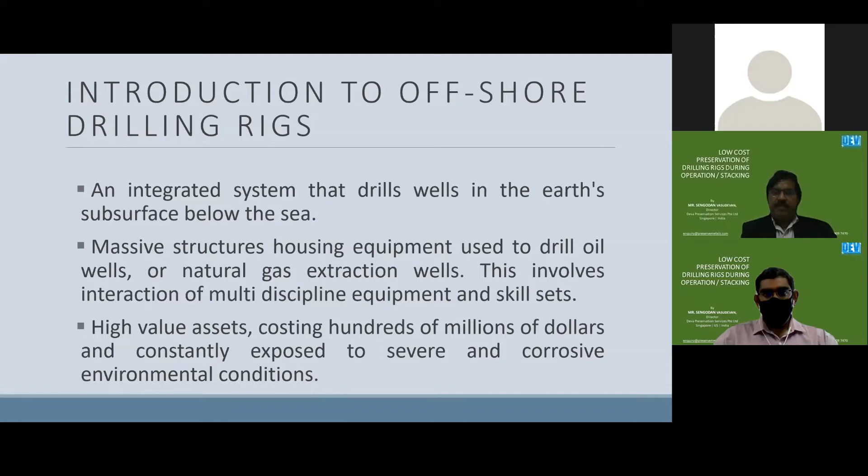And because it is such a high value asset, it becomes a necessity for us to keep it in good condition so that during its entire service life, we are able to spend minimum on repair and rectification cost. And as we all know, in the equipment or structures, wear and tear is a well-known, well-researched and documented phenomenon, wherein we know what to replace when.

After so many years of operating hours, bearings are to be replaced. After so much time, which parts are to be replaced for wear and tear is well documented and recommended by the manufacturers. The area wherein we normally have surprises and shocks which can lead to sudden non-availability of either equipment or a system is corrosion. As we know, corrosion doesn't add value to the process, unlike wear and tear, wherein the asset was under productive use. Corrosion is an unproductive loss of the life of the asset, and as a result, this is to be addressed and eliminated completely if possible. If not, it should be managed so that during the entire service life of the rigs, there will not be any necessity to repair or rework any part of the equipment or systems.

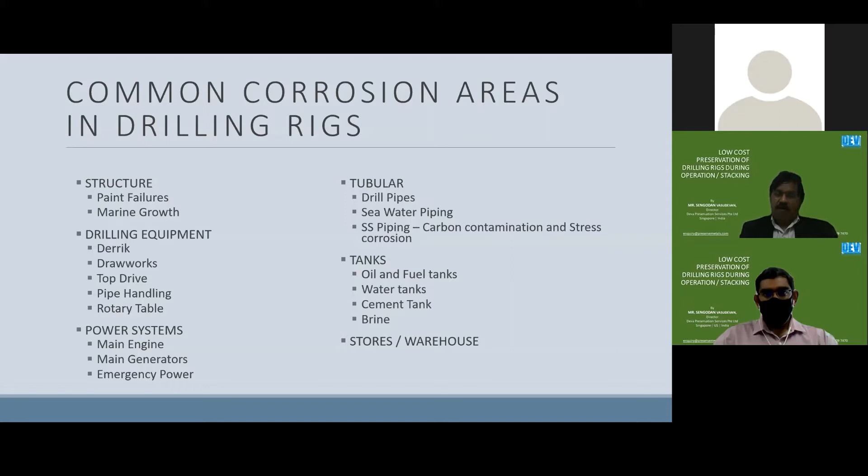One other area of keen interest is the warehouse or the stores, wherein high value spares are stored on board the rig, and in many cases you don't know when there will be a breakdown requiring replacement, and these spares could be stored for a number of years. This is one area where we have significant corrosion issues, and as a result, when the part is needed for use, in some cases the part is not usable, and we have to rush for spot spares urgently.

Similarly, there are other areas like well control, mud systems, lifting equipment, lifeboats and the accommodation, wherein these are various locations where we have either a corrosion related issue or an asset deterioration issue, like the development of mold and mildew.

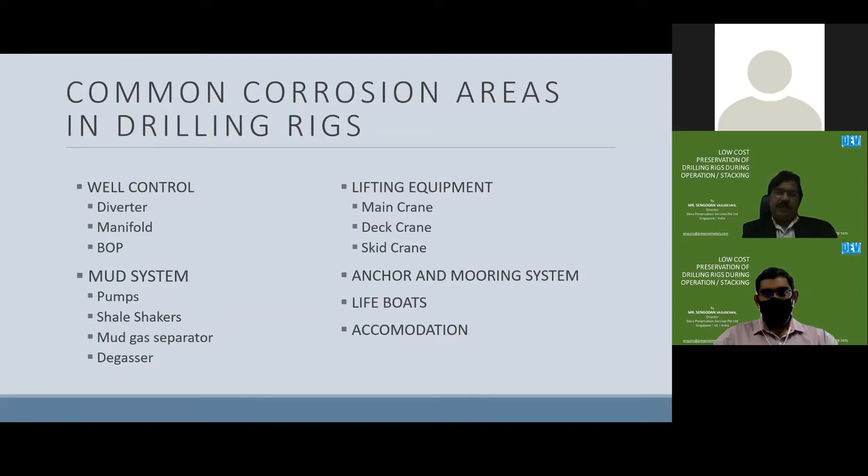Some pictures of the problem scenes have been shared with the team, to have an idea of where such kinds of problems are seen on a drilling rig.

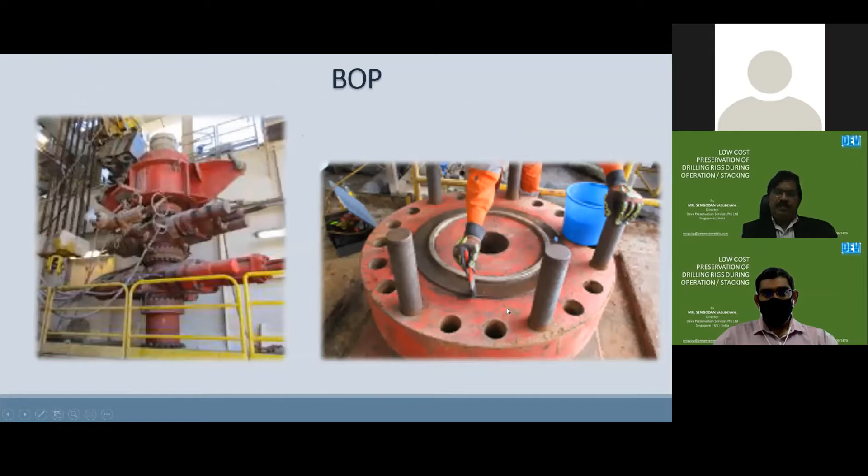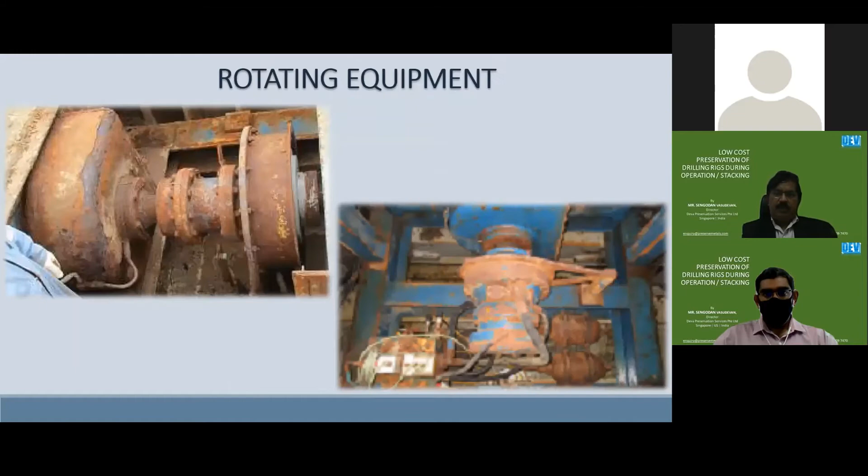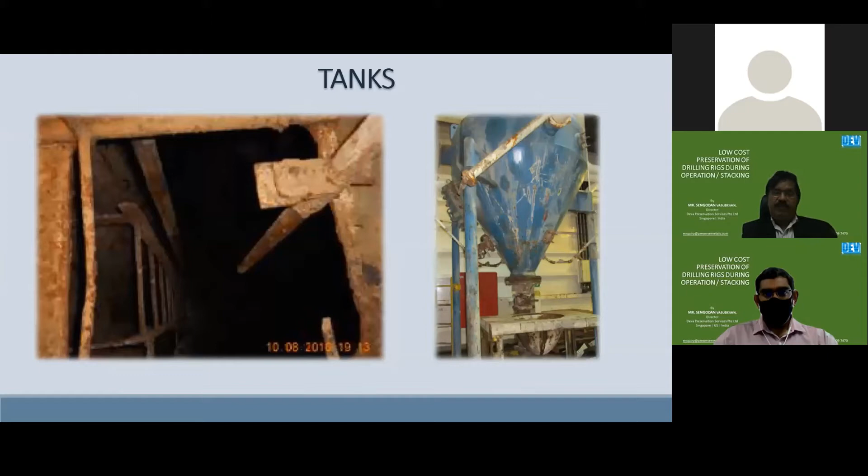Naturally, the tubulars, especially the ones made of carbon or alloy steel, have significant corrosion issues. Also, some of the rotating equipment exposed to the weather elements, the traveling blocks, the tanks, are some of the areas where we have observed quite significant corrosion problems onboard.

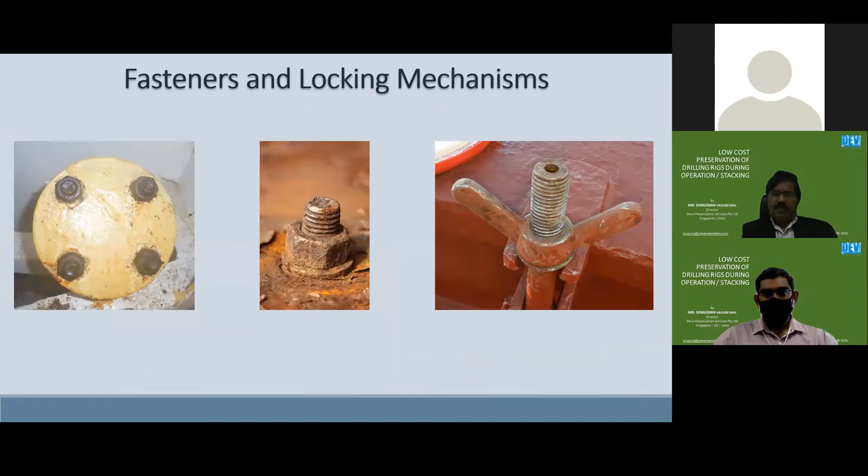And similarly, the various fasteners and locking mechanisms on the deck and outdoor areas. Then, as we indicated, some of the spare storage areas and also the panels. Relatively, in an operating rig, corrosion inside the instrumentation area or the panels is very limited because they are operating powered up and also air conditioned.

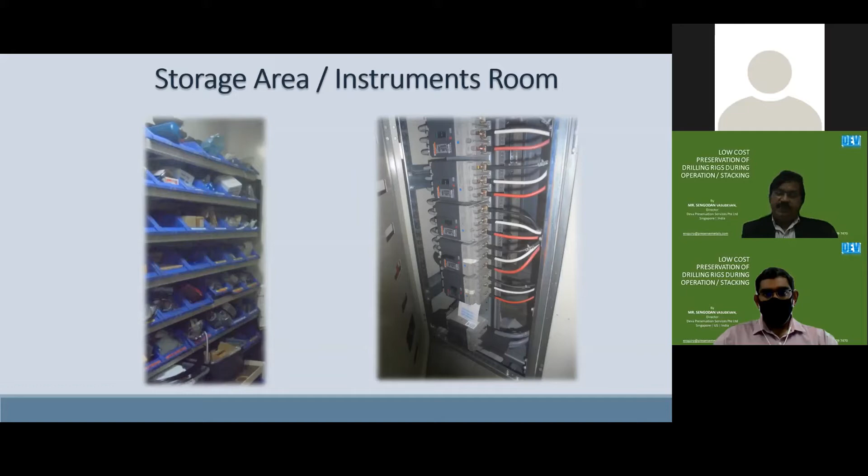However, during layup conditions, these are some of the items which suffer corrosion related failures and cost quite significantly at the time of reactivation.

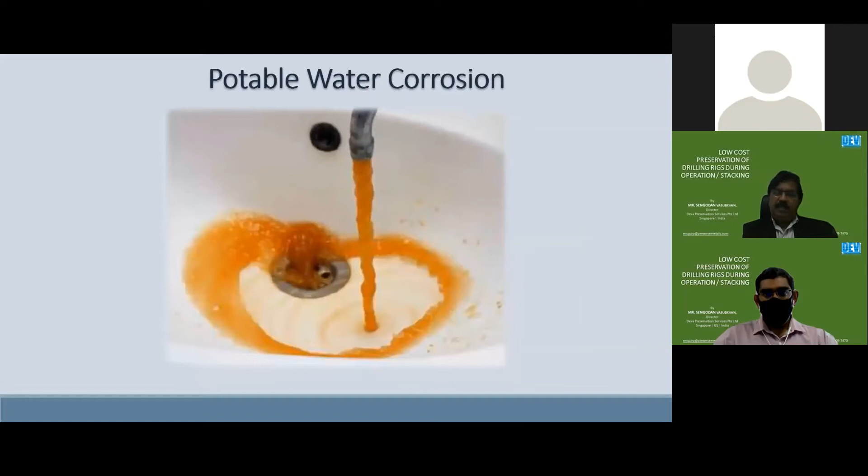In addition to the corrosion related to carbon steel or stainless steel contamination and associated corrosion, we also currently have other problems which are impacting, one being the infected surface. This currently requires disinfection, especially due to COVID and its consequences, the necessity to protect our crew from the infected surface becomes a very important requirement.

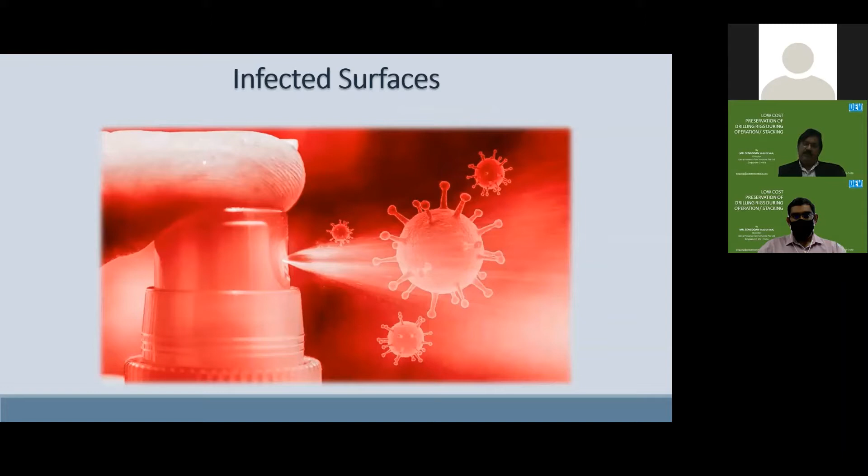Moving to this, the mold and the fungus. These are basically the problems we see significantly in the stacked vessels which are not air conditioned or using dehumidifiers. In such conditions, we find the mold and fungus formation, and also in other areas wherein because of the high humidity, this problem is seen.

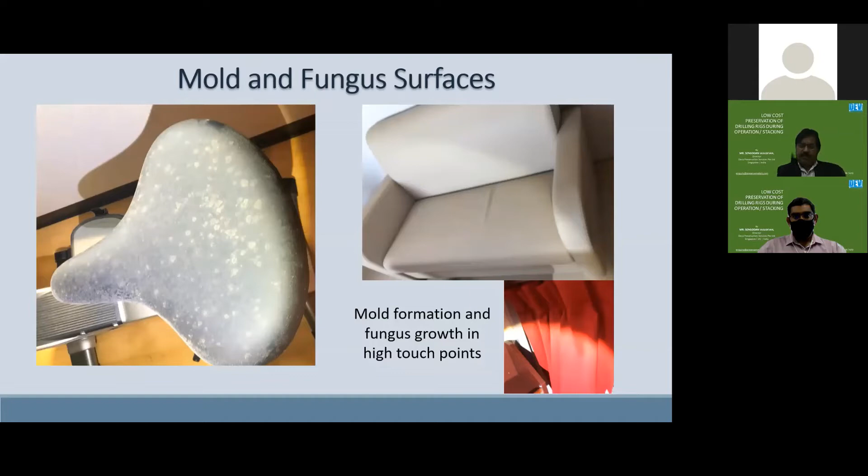Our drilling rig is subjected to various types of problems during its operating life, as also under stacking conditions. For these types of problems, we have had a traditional set of solutions for quite long, for decades. Some such examples are shown here, which are also the experiences we observed on board various vessels, like motors, tanks with rust, instruments, control valves, wrappings, etc.

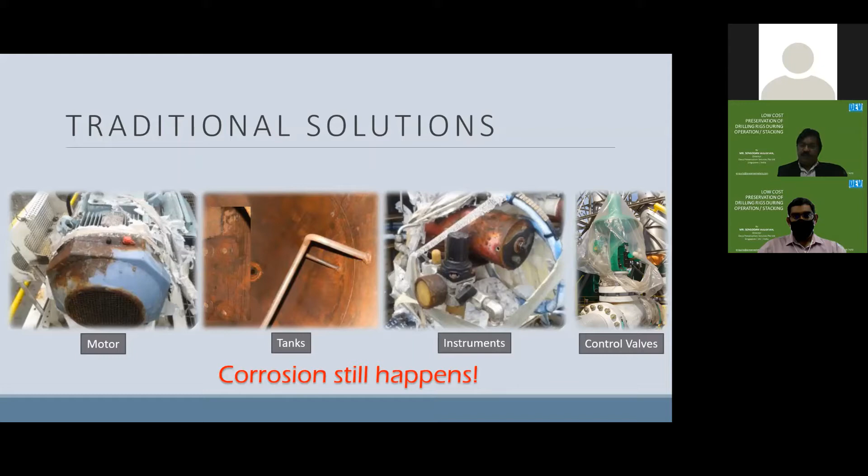If you can see in all these photos, even though the client adopted the traditional method of preservation, still the corrosion occurred. That is where we start to realize and raise the question: in all the methods of traditional preservation, despite spending the dollars for preservation, there is a need to do a repair and rework at some point of time.

We would say that if you are preserving 100 items, it's about 85% of the items where you could manage without a repair or rework due to corrosion. But the balance, about 15% of the items, we tend to have repair and rework. This is mainly not because the client didn't do the preservation properly or didn't follow the recommendations, but because these are the limitations of the technologies used.

In the case of traditional technologies, basically they work on the principle of keeping oxygen and moisture out. For that, they tend to cover the surface. Once the surface is covered, we cannot see what is happening on the surface, whether corrosion is happening or not. As a result, traditional methods are only able to focus on the actions.

What actions can you take? Apply grease, fill the nitrogen. Like this, we can check the actions, but is there corrosion or not? It cannot be checked because the protected surface is not accessible for inspection unless you break the preservative protection. This in turn leads to the absence of a way to monitor the results.

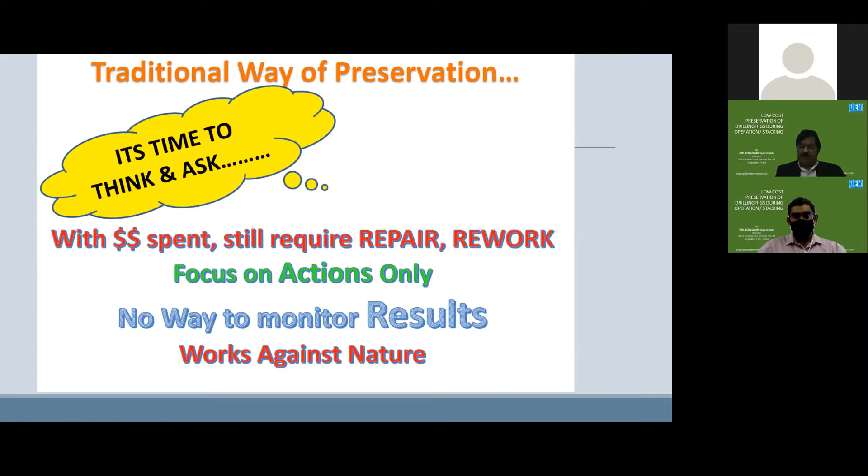So under these conditions, we have researched and identified a set of technologies which could help the client get rid of these problems and the limitations of the traditional technologies or solutions. The objective of this webinar is to share such knowledge with the clients, so that each one of you is able to adapt these technologies or solutions in protecting your assets. As a result, you have a highly reliable and available drilling rig, which when deployed into the contract, never fails and continuously earns dollars for the clients. That's the objective, and with this, let us move on to the latest set of technologies available.

The group of technologies can be separated into two categories. One is called the restoration technologies, meaning there is already some damage, and from the damage we want to recover, to bring it back. In this particular case, we have got technologies like rust removal technology, pickling and passivation technology to remove the existing corrosion, and then rust converter technology.

This particular technology, instead of removing the rust, converts the rust into a preservative. And then metal building technology, where there is local pitting or local crack, etc., is used so that you don't have to replace the asset.

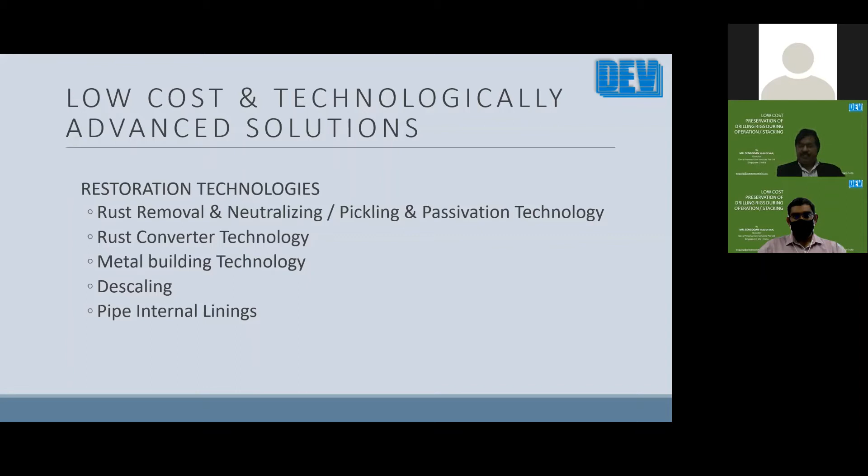And then we have got the next set of technologies called the preservation technologies. These help preserve the asset in the current condition, or close to the current condition, so that during the entire service life of the asset, we don't have to repair or rework this particular part of the asset for corrosion or other deterioration reasons, which we are going to discuss.

So one such widely adopted technology is the advanced VCI technology. We are proud to say that this particular technology we are sharing is the one which can offer the longest duration of protection. Even with one-time application, up to 20 or 25 years, you don't have to re-preserve the item.

And this is particularly suitable for bare metal surfaces or bare metal equipment, to preserve them both internally and externally. While there are some areas wherein this particular technology is not suitable, and in those cases we go for the corrosion inhibitor technology.

For example, in seawater systems, the advanced VCI doesn't work. So we have got an alternate technology to protect the seawater piping, seawater pumps, filters, tanks, etc. from corrosion. We are able to reduce the rate of corrosion to 0.013 mm.

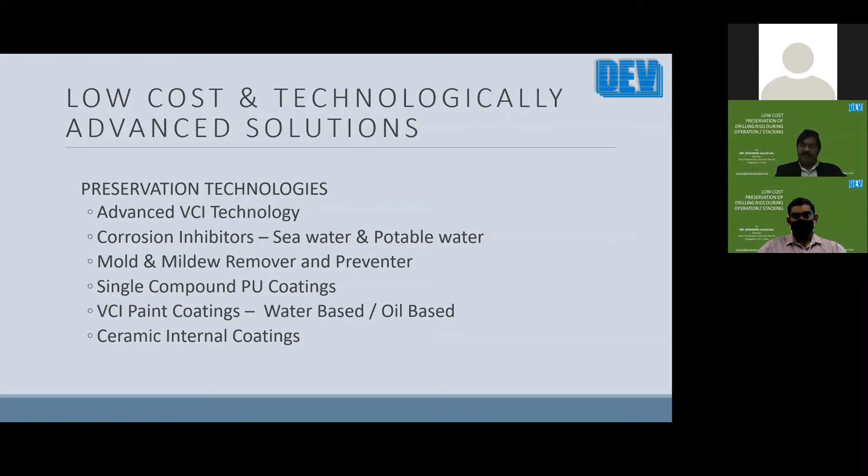With this set of technologies, this is the one widely used for bare metal surfaces, what we call the advanced VCI preservation technology. This we can give as a one-time application for lifetime preservation. And here a word of caution: when we say VCI, all VCI are not the same.

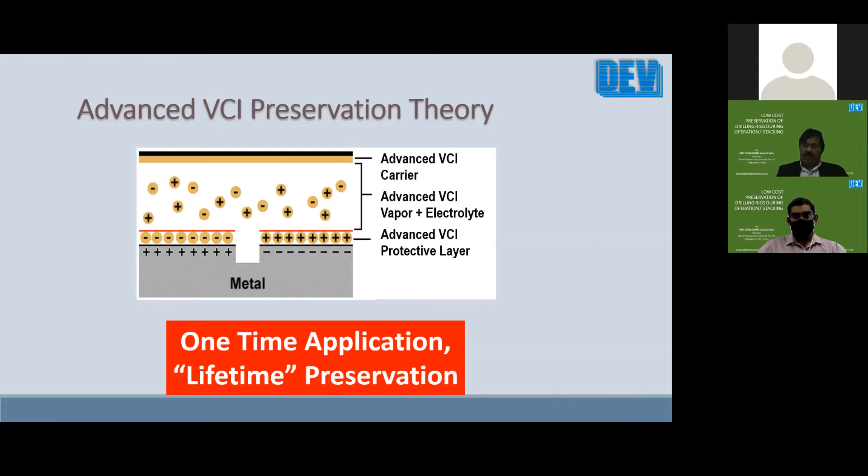Different product manufacturers have got different ingredients, and so there are some which react with aluminum and copper or bronze. But ours is non-reactive with both metal and non-metal. That is one. There are some similar products in the market from other competitors, but their products have got a limited span for preservation. Normally, they are able to guarantee only for 2 years, whereas we are able to warranty for 20 years. That's a big difference for an asset owner, a drilling rig asset owner like you.

So with this, I want to indicate that the good news is that we currently have a range of solutions to cover all the external surfaces, covering the various disciplines. For example, for external surface protection, whether it's a structural item, a mechanical item, piping or equipment, there is a range of products making use of the technologies discussed earlier to keep those assets in good condition. Similarly, for restoration technology, as we discussed, there is a set of products like rust remover, rust converter, etc. Then during the process of manufacture, there are solutions like machining and degreasing solutions, which are usable on board the rig during the operation.

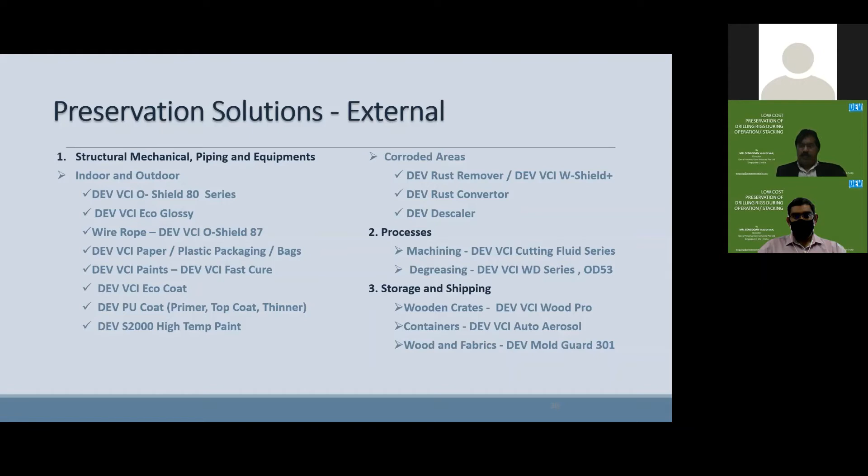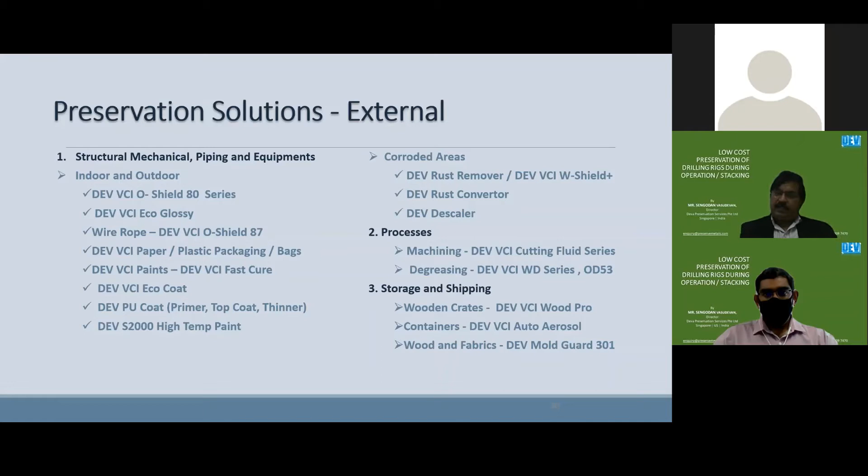Then on the storage and shipping, transportation side, a set of solutions is also currently available. Then we have got certain special application products, which we are going to show. These also use the technologies shown earlier to deliver an asset which is safe for the crew and also safe for the asset owner in terms of its recovery and earning capacity.

Now there is a set of internal preservation solutions for various systems like mechanical piping, both for non-oil based and oil based systems. Non-oil based can mean air, water, or gas for the different systems. Similarly, for the internal preservation of various electrical instrumentation, a range of products is available, making use of the technologies we just briefed.

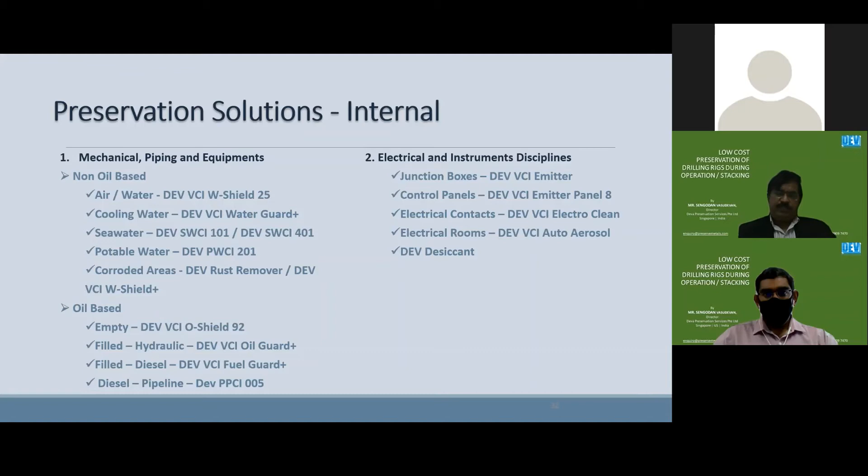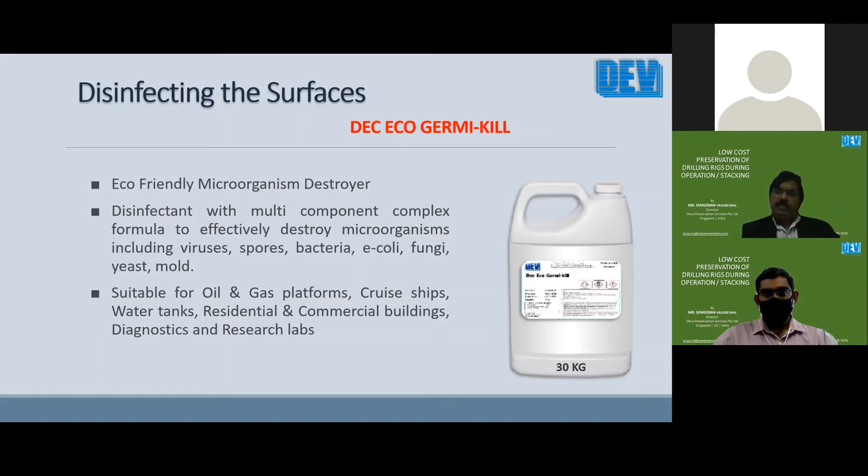Coming to the specifics, this is one of the items of current interest: ensuring that all the high touch points on board the rig are free of germs, viruses and bacteria which can harm the crew. For this, a low-cost, simple solution is available. By applying this, we are able to ensure that there is no damage to the health of the people who are taking care of the operation of the drilling rig and ensuring that it is able to generate revenue.

Similarly, when you come to non-metallic surfaces: metallic surface corrosion is well known, and there is quite a wide variety of products out there. When it comes to non-metallic surfaces, drilling rig clients have very limited choice. That is one area where, based on a client request, we developed this product called Dev Mold Guard Plus. This product ensures that drilling rigs remain mold and fungus free for years with just one-time application under high humidity conditions. Because of this solution, the client is able to eliminate the need for dehumidifiers and for running the air conditioning.

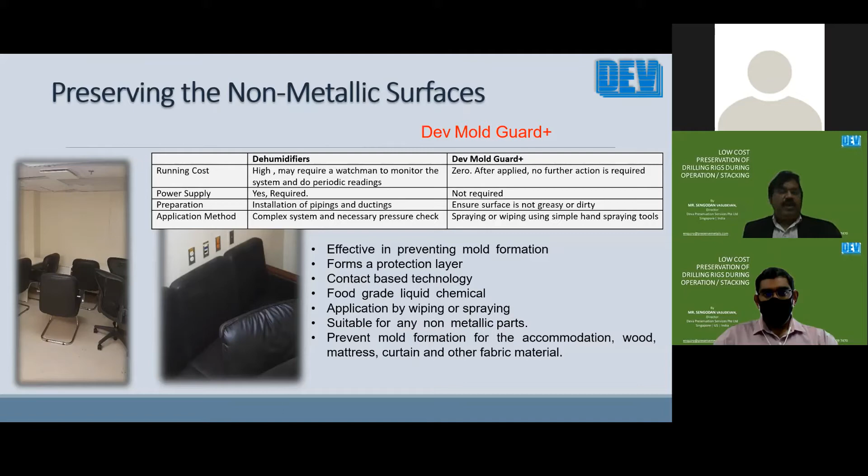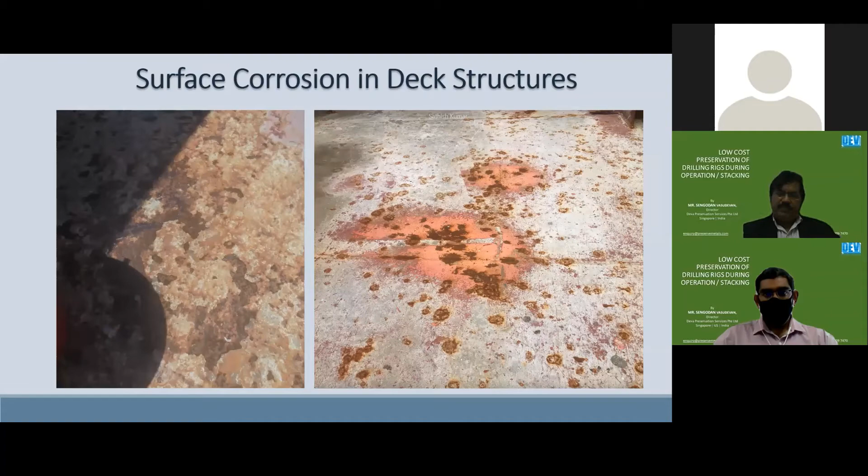Similarly, for surface corrosion in the deck structures, this is the type of problem seen, and for this we recommend the rust converter and rust remover products. On painted surfaces, it is more appropriate to use the rust converter than the rust remover, so that the rust remover doesn't get below the paint film due to capillary action and stay there.

But wherever the epoxy fails and leads to corrosion, in those areas we can locally use this PU coating, and it is compatible with the existing epoxy. That way we don't have to completely remove it in all areas to replace it with the PU coating. It can be locally repaired as a repair solution.

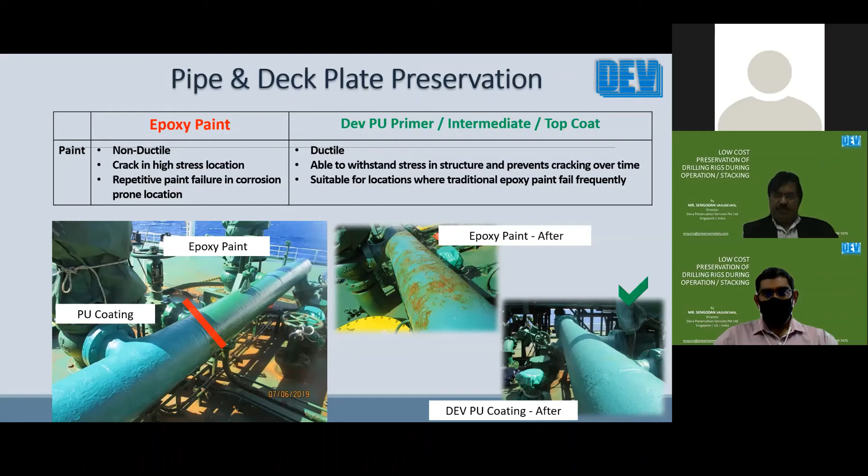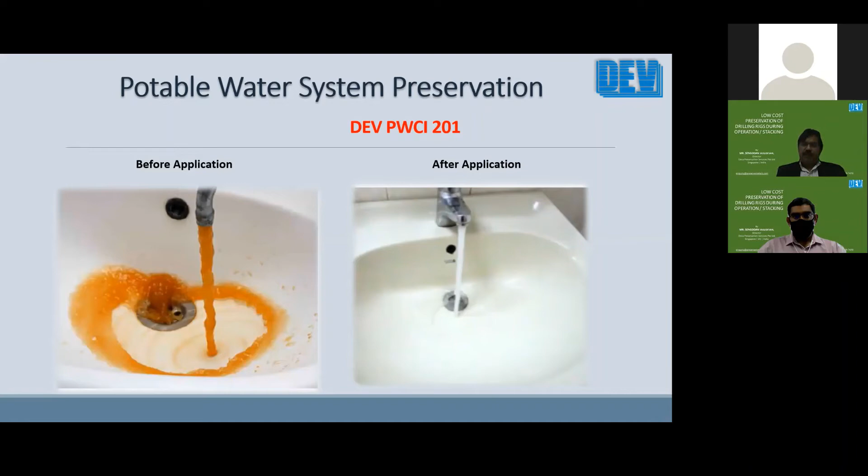Coming to seawater corrosion, this is a major problem area for our clients, wherein the seawater piping tends to need repair after 4 or 5 years of operation. And this we are able to completely eliminate with this additive SWCA 101. This additive is able to bring down, as I said earlier, the rate of corrosion to 0.013 mm per year. So as a result, the corrosion allowance provided is more than adequate.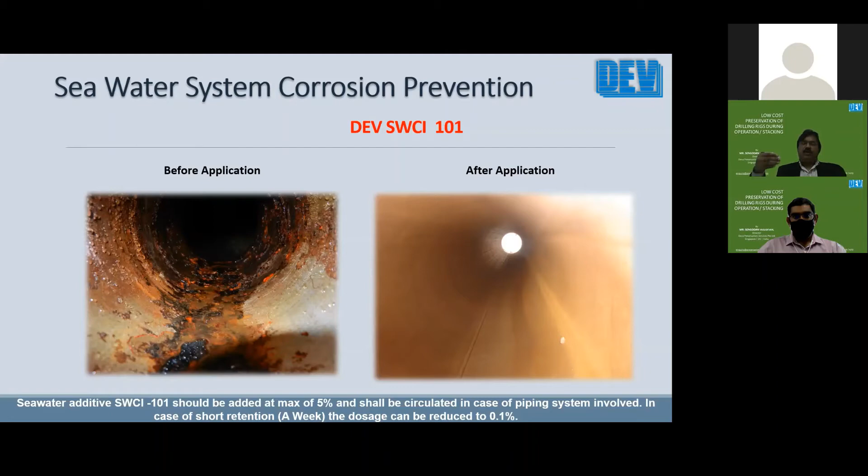Even at the time of the asset getting scrapped, the pipe will have adequate thickness. So never will you have to repair or replace. Not just the pipe, the corresponding tanks, and also the filters, the pumps, and all the other equipment in the entire system, the flow path of the seawater, gets protected. As a result, this can save quite a lot of cost for the client.

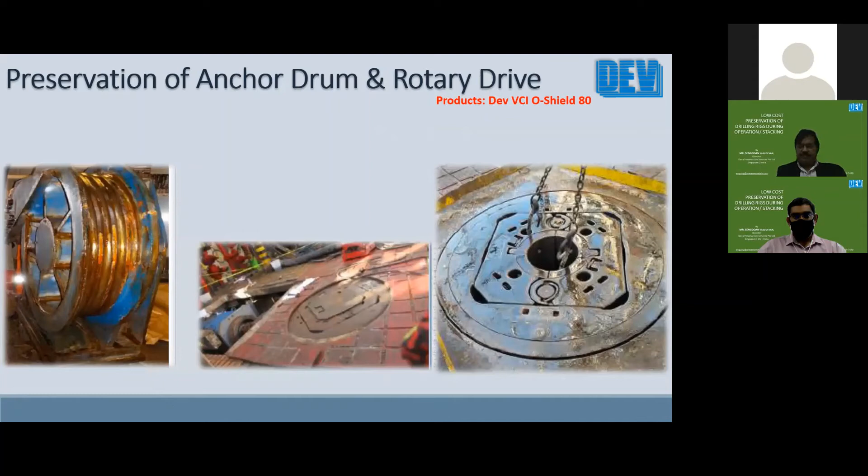The other product available using the technology is for external preservation, called O-Shield 80. It forms a wax-based film to provide long-term protection for bare metallic surfaces. And similarly, on top of this product, there are other products like O-Shield 82 for stainless steel surfaces. Particularly for cold stacking, we recommend using the UV resistant VCI shrink film. This takes care of the weather protection and also the corrosion protection of the materials. And later we will see how these products perform even after years of operation in the examples.

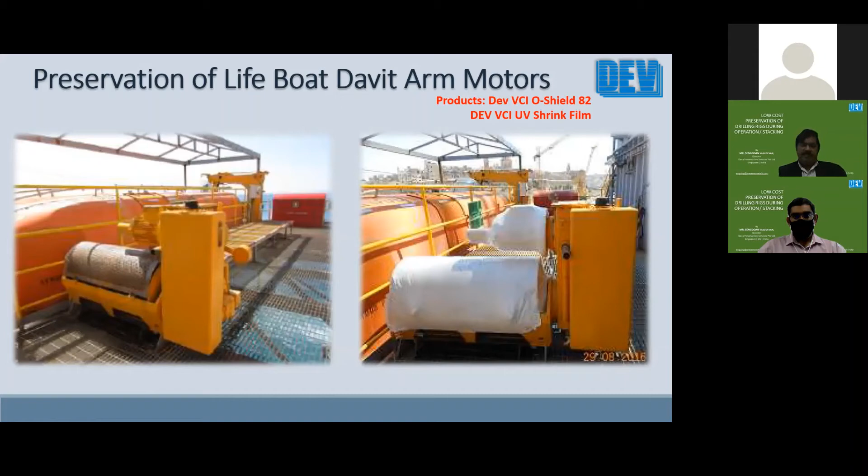The next one highlighted here is the W-Shield 25. This is used for preserving the empty tanks during the stacking time, so that until the rig is reactivated for a contract, all the tanks remain in the same good condition. And this is done after washing the seawater tank. Freshwater tanks and all, no issue. If it's a seawater tank or a chemical tank, the tanks are given a fresh wash before preserving with this additive. This is in the form of a spray.

We are installing a corrosion monitoring coupon like this to enable ongoing monitoring and assurance, which I said was not available in the traditional technologies. With this, you can see even after 30 months of preservation, with one-time preservation, the corrosion monitoring coupon remains in the same condition, showing that all the tank internals remain in the same condition without any further deterioration.

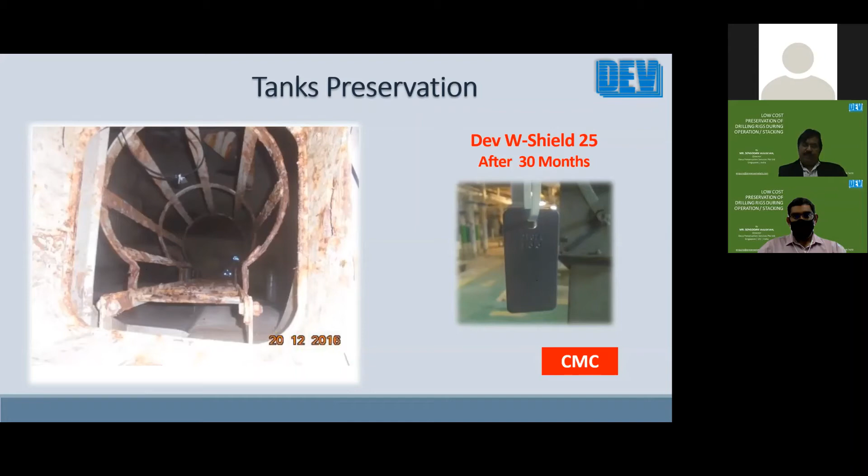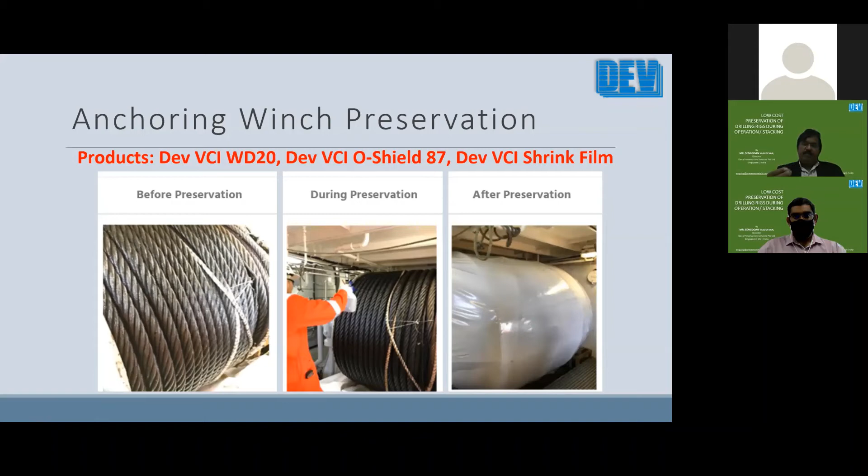The same way you can see there the anchor winch preservation. This is for normal warm stacking, and if it is required for cold stacking, then we use the shrink film also. The advantage of this O-Shield 87 is that it is able to penetrate through the wire strands and thereby reach the core. While grease can protect only the external, and water can reach the core and initiate corrosion there, this oil is able to prevent such corrosion from the core of the wire ropes.

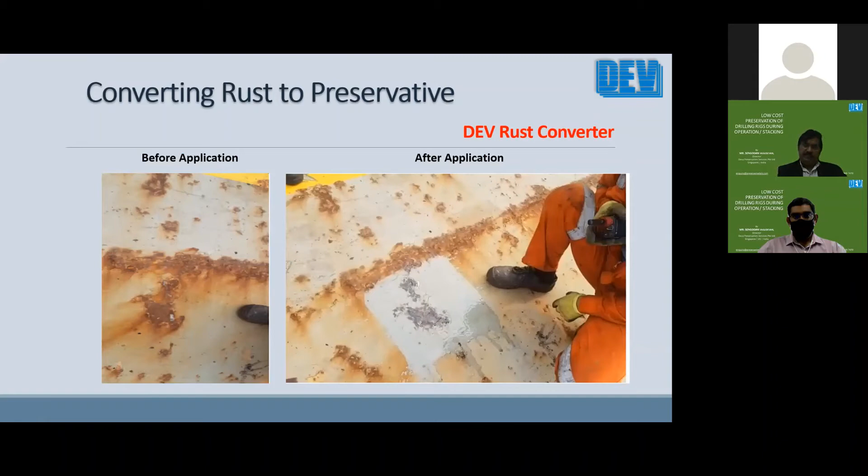This is the example we discussed about converting the rust into a preservative, where it is hard to remove such rust. Also, particularly in an operating asset like an oil and gas platform, sparks are not allowed, so we cannot use power tools. Similarly, a drilling rig during the operation stage. So wherever sparks are not allowed, the rust converter will help to convert the existing rust into a primer, so that you can do a coating which will last long, unlike coating directly onto the rusted surfaces. And these are the special applications.

This is like a face mask. This is one of the products which I love because it is very simple to apply and provides multiple benefits. This can be suitable for outdoor use, for protecting precision faces, and also to protect parts which have stress corrosion issues. We had seen in many stainless steel pipings, the straight pipe was okay, but the bends used to have stress corrosion problems.

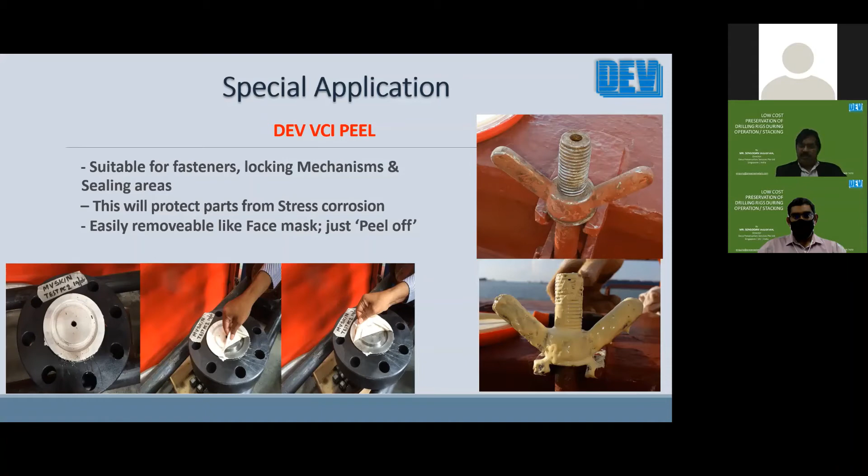In those cases, just by applying one coat of this VCI film, the stress corrosion issue is eliminated, and this particular thing can be removed. Like in the case of gasket faces or fasteners, when they want to remove it, this can be peeled off like a face mask, and then the part can be accessed.

All these tanks have got breather valves, so the moisture can get in and out due to the temperature variations during the day and night. So the moisture inside condenses and forms a water pool at the bottom of the oil tank, and the top aerated surface is exposed to the moist air. So these areas, both the water below the oil and the tank surface above the oil, can be taken care of by this Oil Guard additive by forming a protective film on the metal surfaces above the oil, between the oil and the metal tank, and also between the water and the metal tank. As a result, the tank and the parts are completely protected.

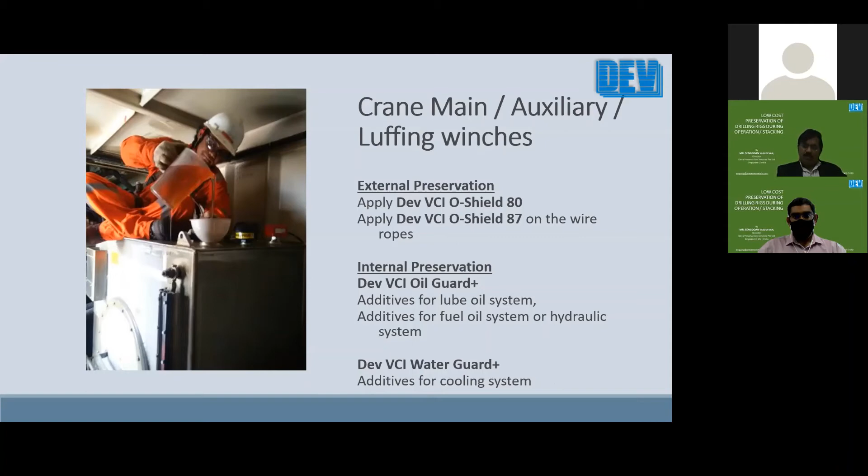The same way, there are solutions available for the fuel systems. For the fuel systems, you have got the Fuel Guard. For the cooling water systems and also water-based hydraulic fluids, we have got the Water Guard. These are some other examples of the application of this O-Shield 80 to protect the assets.

And this is an interesting area, the internals of electrical and instrumentation items. This is one of the lowest cost known items as of now to protect such internals. Unlike the desiccants, the traditional technology we were using, desiccants absorb moisture, then get saturated and you need to replace them. Similarly, when we open the panel and close it, moisture gets in, since desiccants or silica gel don't absorb it instantaneously.

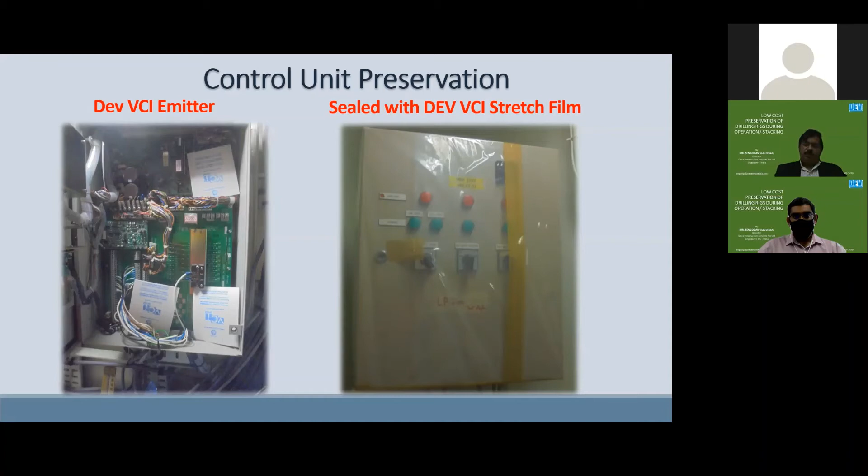Instead, these advanced VCI-based emitters protect all the metal surfaces during operation or during stacking. As a result, even when we open and close and moist air gets in, it cannot touch the metal surfaces. So it provides assured protection, unlike the desiccants or silica gels of the traditional methods. In the case of the cold layup, this is additionally protected with the stretch film containing VCI. That way it is able to provide long-term protection until it goes for reactivation. Whether 6 months, 1 year or 2 years, it provides protection irrespective of the duration.

And on the same principle as the VCI emitter, there is a VCI emitter panel. This is mainly for the control panels, because inside the control panels we don't want to have loose pieces. So there we are using the emitter panel 8, which is slotted in the slots available in the control panels. The same way, this internal emitter is applicable for the lighting fixtures.

So with just about 50 cents, you can protect outdoor explosion-proof equipment costing thousands of dollars, because this ensures that there is no condensation inside. That condensation cannot initiate corrosion at the contact points. Also, there is a product called ElectroClean. This product is suitable for electrical contacts in switchgear, ensuring that you clean the contacts while not affecting them electrically.

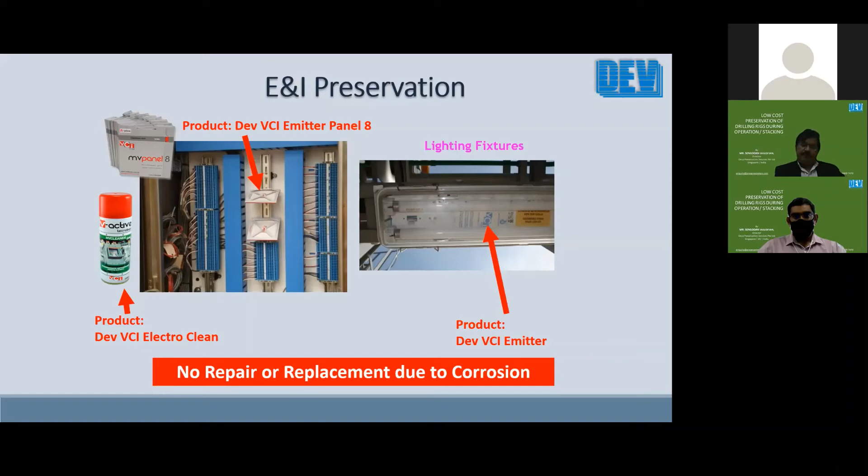This is another interesting product for flange protection. Normally the gasket faces of the flanges are very sensitive parts that can easily get damaged. Once damaged, they require significant repair and rework. To eliminate this, the flange dots can be used. These are suitable during blasting and painting; they will keep the flange faces from getting damaged.

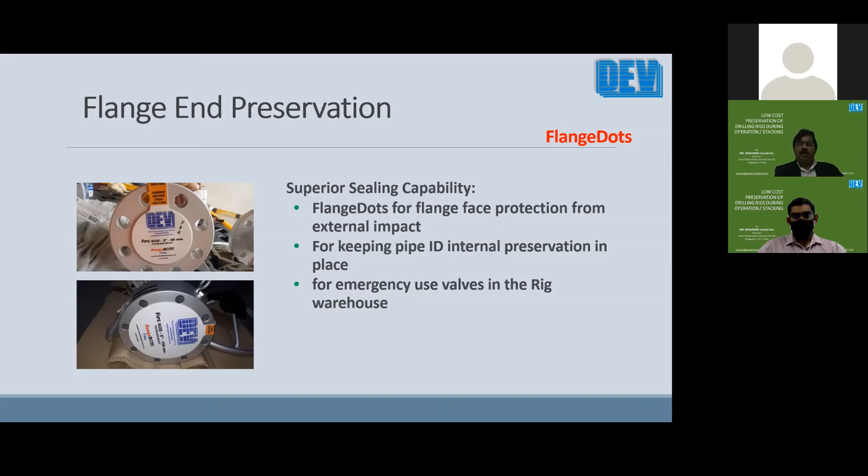And this is the photo above. It shows the condition of a diesel tank after about 4 months of leaving diesel inside after the pre-commissioning phase. During that phase, sulfate reducing bacteria damaged the diesel quality, and also caused corrosion and bacterial growth inside the diesel tank, for which a Fuel Guard solution is available. By adding this to the diesel, you'll be able to ensure that the entire circuit through which the diesel flows, right from the arrival point or diesel tank to the day tank, piping, and pumps, gets protected from corrosion related problems.

The additive is used in different quantities: for long-term layup it is 2%, for intermittent use like an emergency generator 0.5%, and for continuously running equipment like main engines, it is recommended to be 0.1%. This is there to keep the total system free from corrosion.

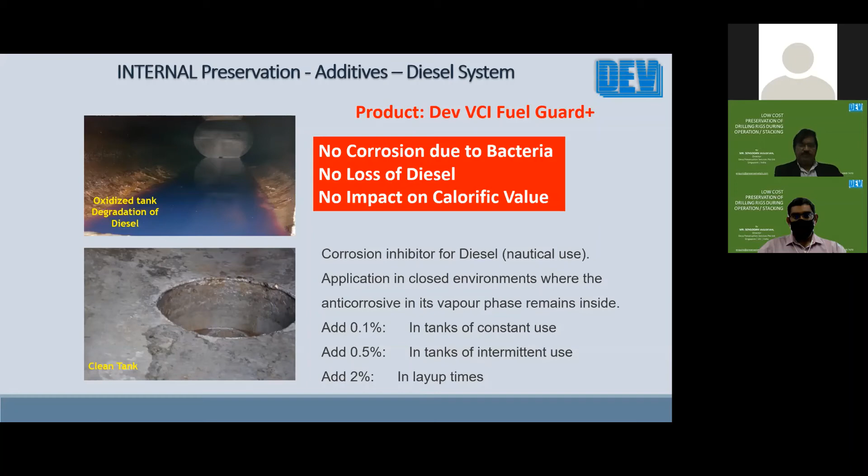The same way, with oil and fuel in an operating asset, clients are less worried about corrosion. But that is not the case with water-based systems, whether cooling water systems or water-based hydraulic fluids. Corrosion is an issue, more so in the aerated spaces of the systems. For this, the Water Guard additive is able to provide continuing protection both during operation and during stacking.

And also for information, all these products, wherever these additives are used, are tested for compatibility, proven 100% compatible in terms of viscosity, not forming any reactions, and not forming any sedimentation or floats. Only after proving that and keeping it for a period are these products added, so that the client is not in for a surprise at a later point in time.

And not only that, as we will see later, these compatibility tests are monitored in our lab for an extended period, like years, on an ongoing basis, so that anytime the client wants an idea of how the item was preserved and what its condition would be, we are able to show how the condition continued. So for the various drilling rig projects where samples were taken, we are still monitoring, in some cases even after the client has reactivated the vessel, to know the long-term impact, if any.

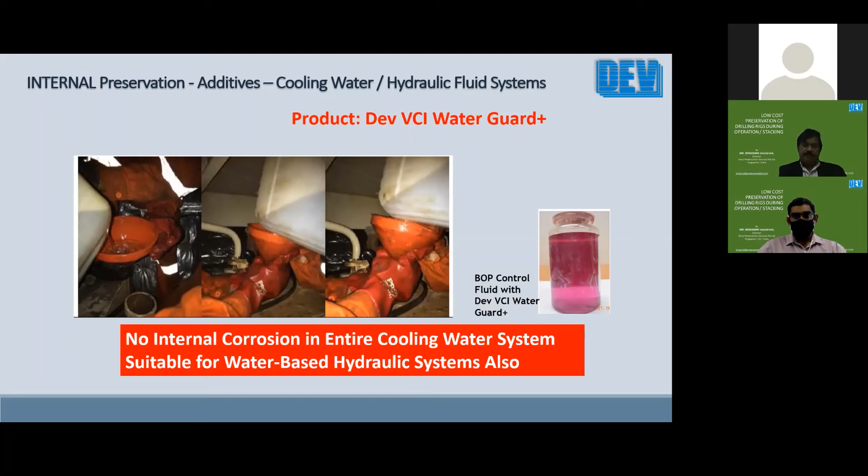And now this is for the entire system, the Oil Guard plus what we were discussing earlier for the lube oil and the hydraulic oil systems. And this is like a room sprayer. We have got a similar principle to spray the VCI vapor, which is a non-toxic and non-hazardous kind of vapor, to fill up the enclosed areas and protect all the exposed metals.

For example, in the control room, when it is down, when it is stacked, instead of using the dehumidifier, which requires a continuous power supply, fuel, and monitoring, these solutions enable complete sealing, and a zero-power-on-board kind of stacking is possible.

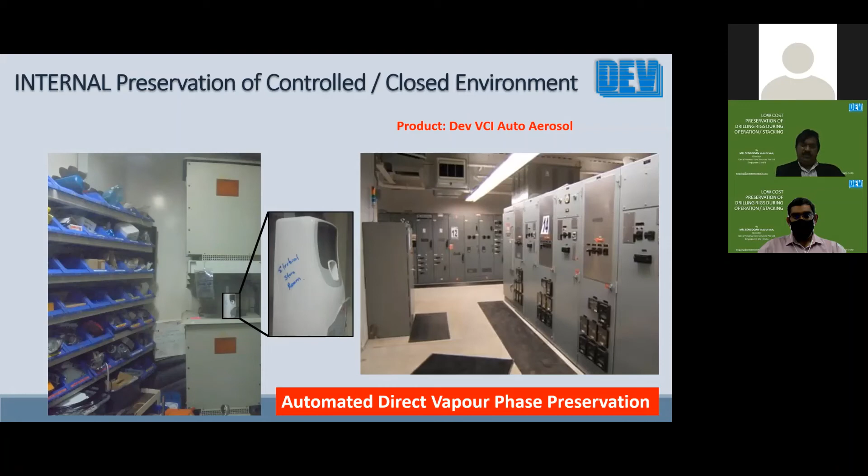Next come the packaging solutions, which are more appropriate for the drilling rig clients when you buy some items and then transport and deliver them to your drilling rigs, and also when you are storing these items on board the drilling rigs for use at a later point of time. So there are different packaging products.

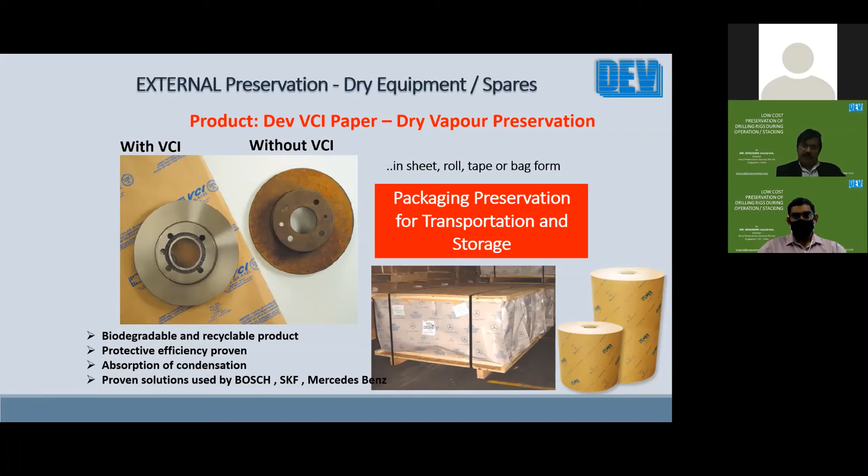So depending upon the nature of the requirement, wherever there is local condensation or high-value items, they are covered with the VCI paper before wrapping with the VCI plastic, because any spot condensation will be absorbed by the paper so that there will be no spot corrosion on the product. At the same time, for the other items, we are able to use the stretch films to have total protection or cover of the panels and the equipment, to prevent new moisture from entering and protect the internals in the existing conditions.

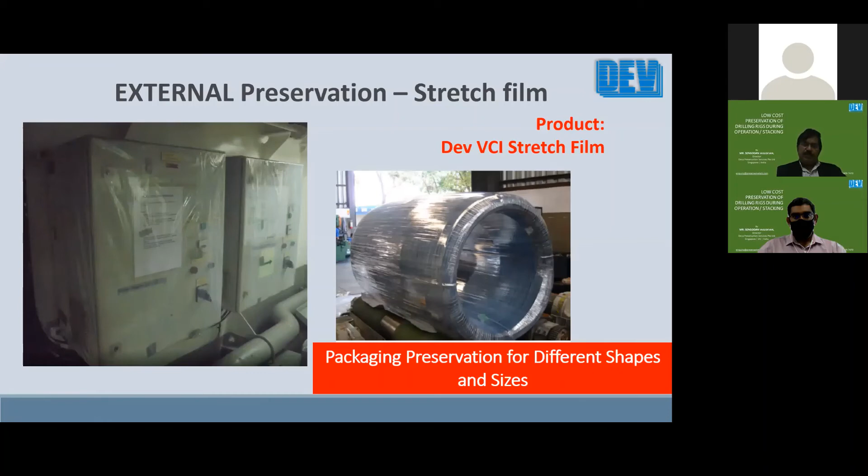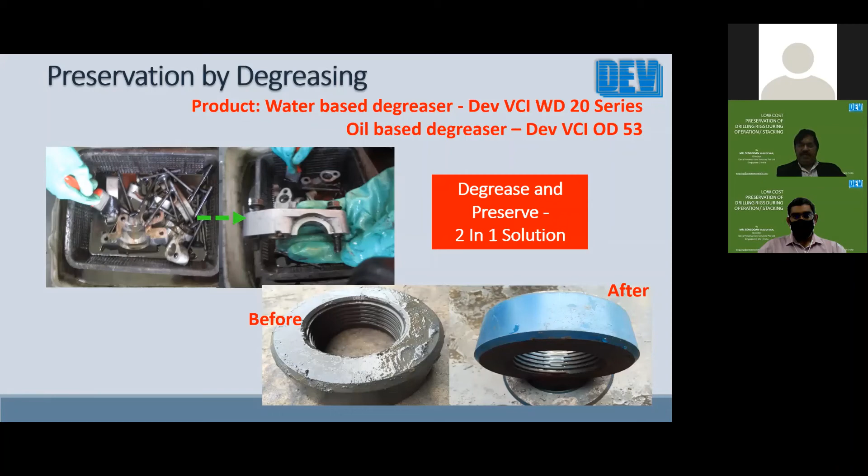These wrappings are used during the stacking conditions. During the operating conditions, these are used only for the spare parts which are not in use. Similarly, for the workshop on board, the degreaser is one of the good solutions because it does 2-in-1. After degreasing, normally the flash rust will come. These solutions prevent the flash rust and keep the product for long until it is put to use.

This is another interesting thing. You could see that when the rig is stacked, normally many people do not care about the non-metallic parts, whether it's the electric cable or the hydraulic hoses or other rubber parts or even the life-saving equipment, because they think that they are meant to be outdoor. Yes, I agree that they are meant to be outdoor, but they are meant to be outdoor while producing, because there is a UV impact on all these plastics and the rubber.

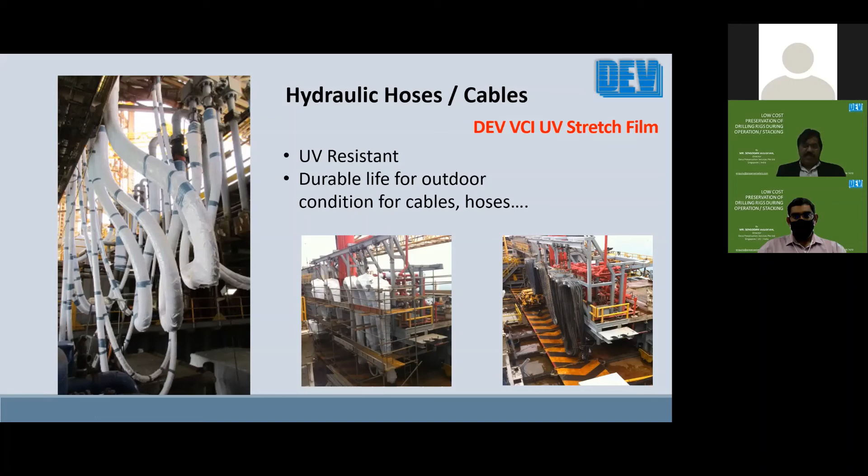So if these are exposed during the operation of the asset, it is meant for it, and by then it is earning. But during the stacking time, when it is not producing or yielding any contribution, the continuous UV radiation will impact its service life, which will require later repair or replacement during the service life of the rig. To avoid that, during the stacking time, we use the UV-resistant stretch films to wrap and protect the non-metallic surfaces so that the assets are maintained in the same condition. Whatever the condition of the pipes, hoses and non-metallic materials before stacking, the same condition is maintained after the stacking period when the vessel is getting reactivated.

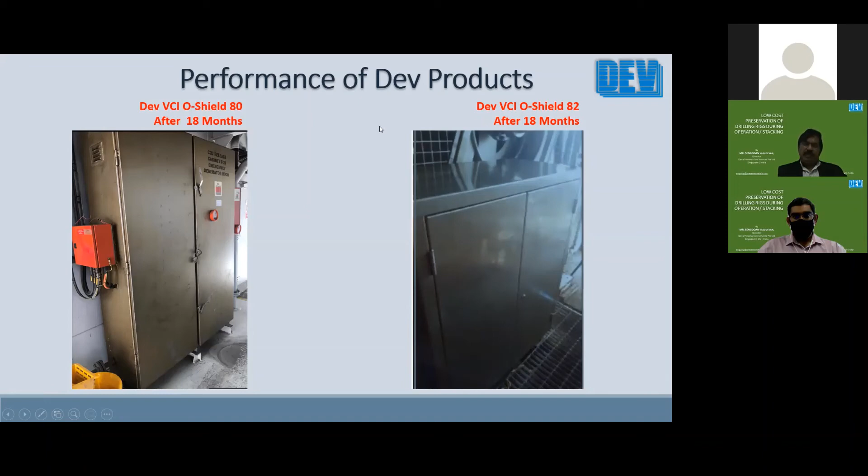And here are some examples of the performance. For example, you can see these were taken on board after 18 months of preservation when we did the inspection, showing how it is still protecting without any corrosion. And similarly 80, 82, these are the ones showing an example. And this is basically a lab test for the W-Shield 25. This you had already seen in the tanks after 18 months of operation, how the tank is getting preserved.

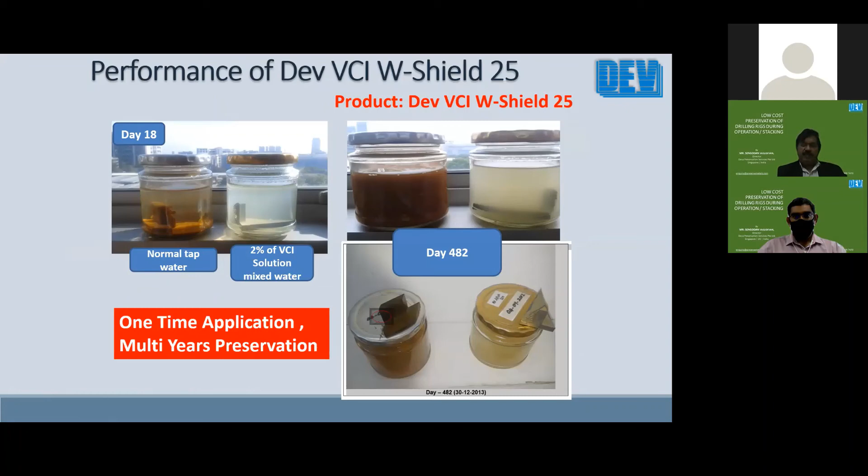And this is a recent example from one of our clients, which we preserved about 32 months earlier in Southeast Asia. The shrink film is still in good, intact condition. Even though it is warranted for 12 months, it has performed up to 32 months because in this area the UV radiation was less, so the damage due to UV is lesser. But normally it depends upon the location, because in places like Houston, Texas, where we have a very high intensity of UV radiation, we normally recommend replacing it after 1 year or at least after 2 years. After 1 year, you start to monitor, then after 2 years, it is better to replace it.

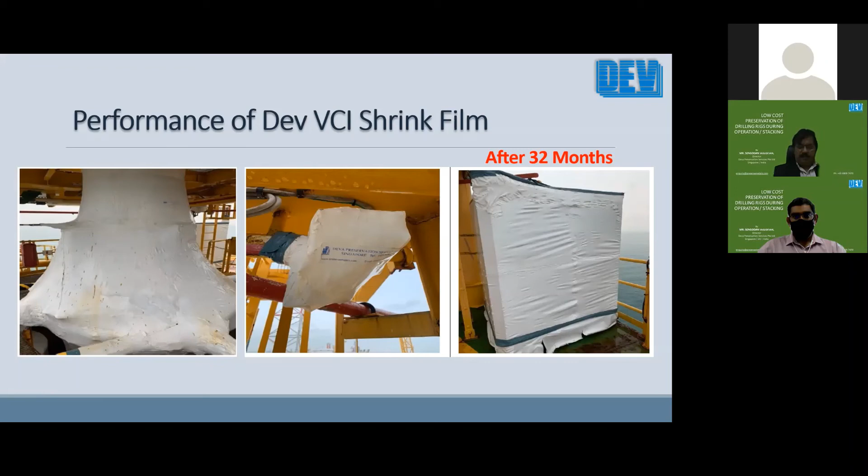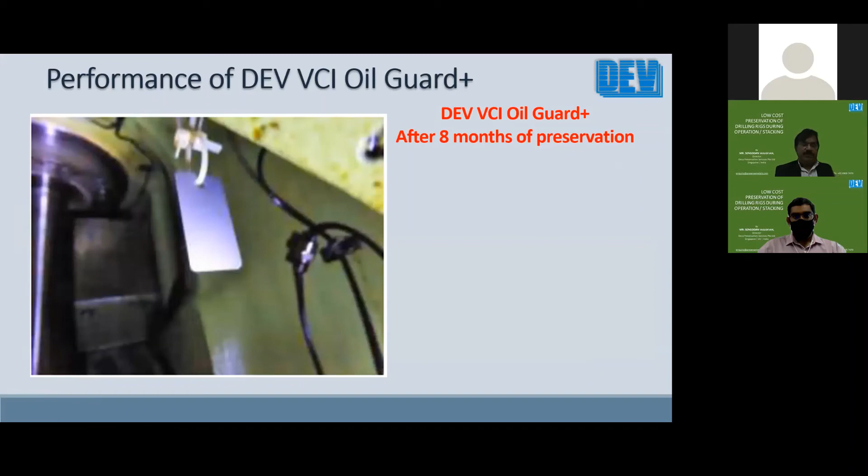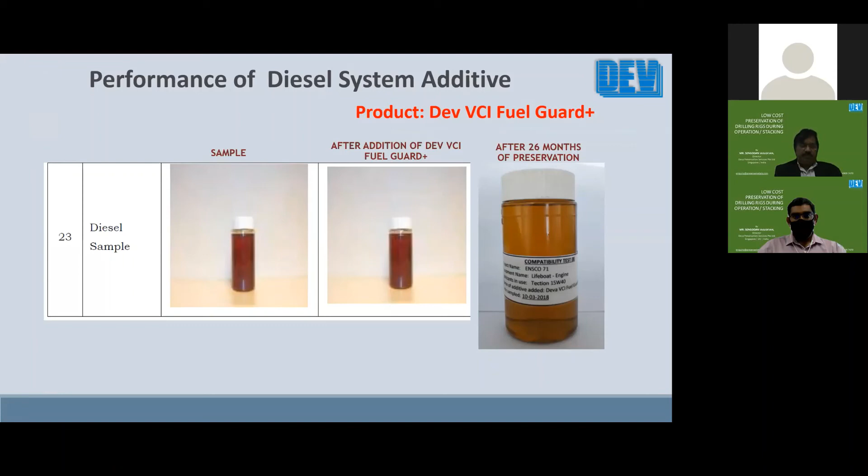This is to show examples of compatibility analysis and how the additive continues to perform in the same way without any impact on the oil properties and performance. Here, for example, with the diesel system additive, the fuel guard additive, even after 26 months, it remains the same. But as we know, in most cases, this diesel is consumed during this period.

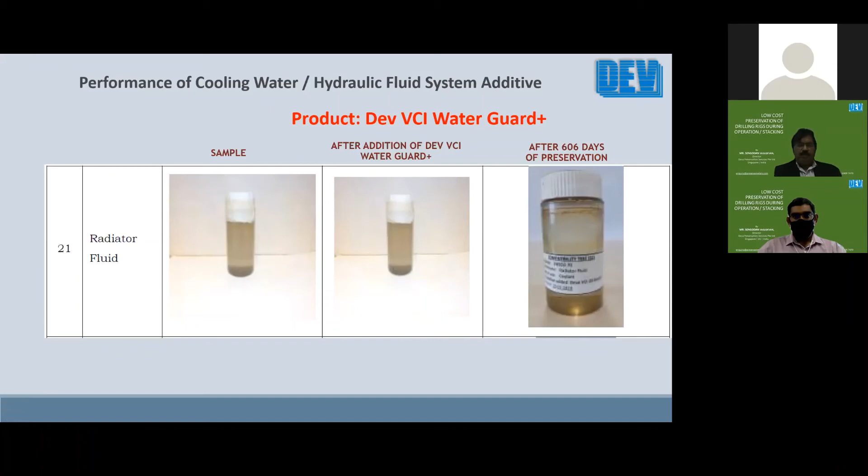The same case for the hydraulic fluid, which is a water-based one. We had added a water guard, and this, after 606 days of preservation, is still in the same good condition. No sedimentation, no color change, and no separation.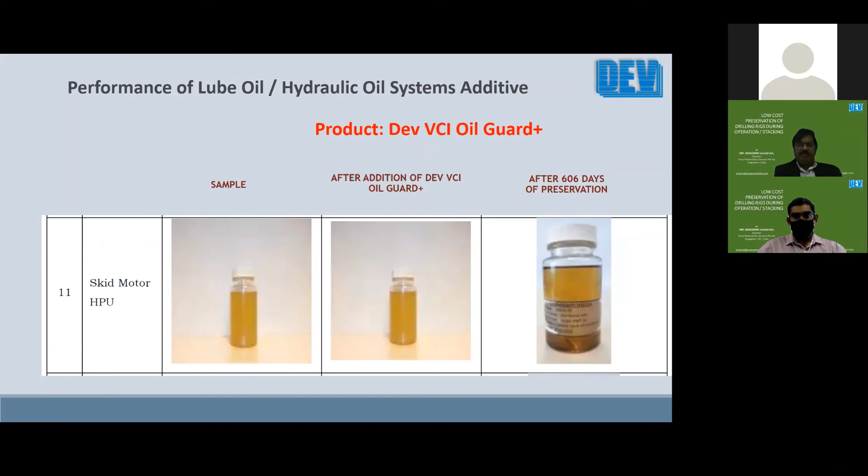Similarly, for the oil guard, which is an oil additive for the lube oil and the hydraulic oil, the same performance after 606 days. These were live examples from various drilling rigs which we had preserved earlier.

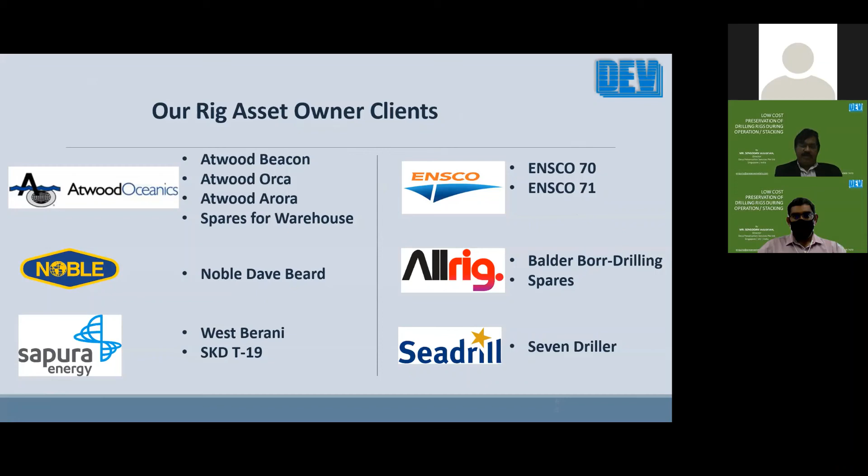And of course, we added a set of clients to whom we have provided the service and continue to provide our service. This shows the set of other asset owner clients to whom we are providing this. With these solutions, I would like to talk about Deva PS as a company briefly before we conclude this webinar.

Unlike other parties wherein somebody will do the recommendation, somebody will supply the material, and somebody else will do the preservation, at Deva, based on our experience in Deva management as an asset owner representative, we have created a vertically integrated solution called Integrated Project Preservation Solutions.

Here we take care of the diagnosis and the preservation recommendations, the supply of preservation materials, and supervision of the preservation works if they are carried out by the client's crew or team. Where it is required, like stacking or layering, we also provide our own technicians and engineers to execute the preservation works.

Once it is completed, we provide very detailed documentation for the preservation activity, what was done on board, so the client is able to refer to it at any point in the future. It normally runs in hundreds of pages with photographic evidences. And if the client requires class certification, like from ABS, DNV, and other parties, we are also able to arrange that on a cost-plus basis for the preservation we have done.

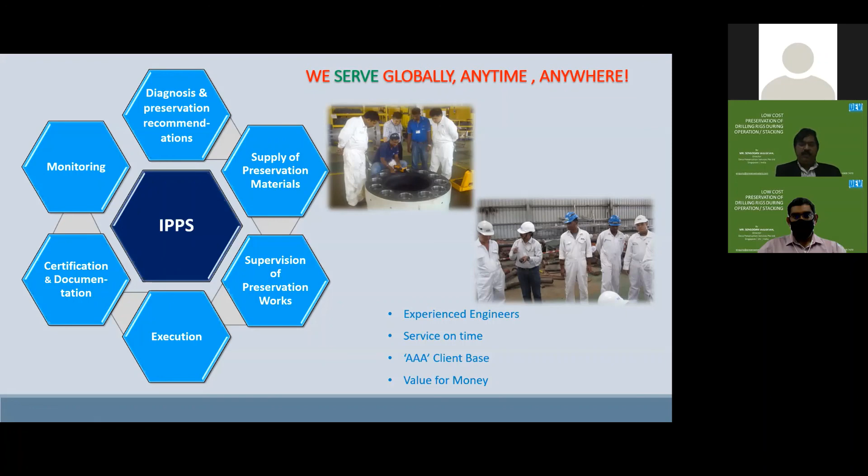So we are here to be your partner for the long haul. We are not here for just doing one activity and disappearing. We would like to be your corrosion consultant and corrosion solution provider for the entire service life of your assets. Towards that, we are ready to develop new solutions, as we have done in the past, based on client requirements when current existing technologies and solutions are not adequate enough.

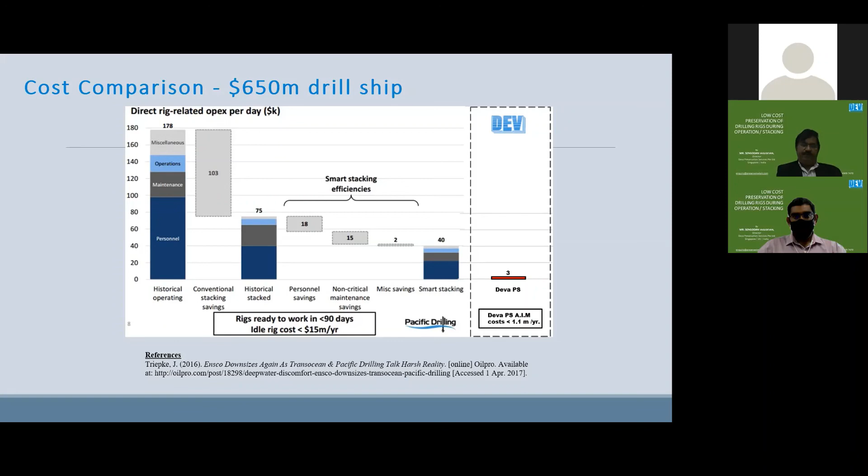With this, we show the traditional versus advanced technologies cost savings. Then I come to the conclusion session, wherein we would like to highlight that drilling rigs can be maintained without repair or rework due to corrosion during the entire service life, even if it is a seawater system.

Because basically many engineers, even myself before exposure to this technology, were resigned to the fact that if it's carbon steel, it will rust. If it is a metallic one, there will be corrosion. People are currently saying, learn to live with corona. Like that, all of us had learned to live with corrosion and rust in the past, but no more is it required.

Like we eliminated such cases in other pandemics, we have got the technologies for eliminating the corrosion completely and eliminating the associated repair and rework on the service life. The latest technology doesn't mean that it will be more expensive than the traditional one. So this can help reduce your cost of asset ownership very significantly during the operation of your assets.

For all operating assets in the field, here is what we are offering: a pre-agreed package with a guaranteed minimum of 10% savings in your maintenance cost. We are willing to partner with clients and offer them this package so that your maintenance cost is saved by us a minimum of 10%. If there are more savings, we try to work out an incentive mechanism wherein we share the benefits.